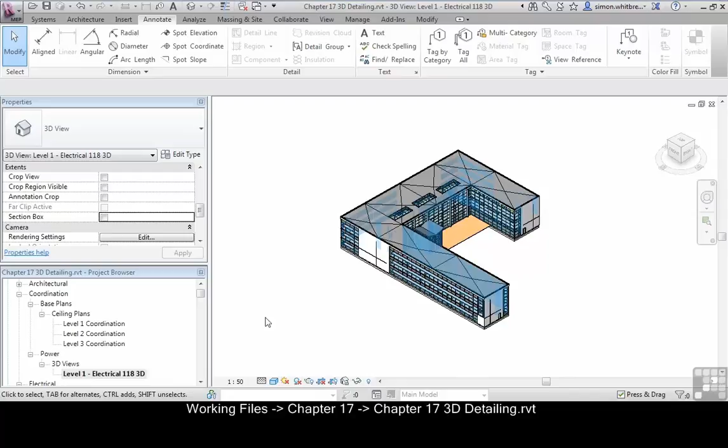Well, strictly speaking, we're not actually detailing. What we are doing, however, is presenting to the reader of our documentation some clearer indication of what our design is all about. From your startup screen, browse to Chapter 17 and open the file Chapter 17 3D Detailing.

In the project browser, scroll down to the coordination section and make sure you have the view Level 1 Electrical 118 3D under the Power section open. I'd like to be able to crop this view so that it matches a section I created in an earlier exercise. I can do this using the section box.

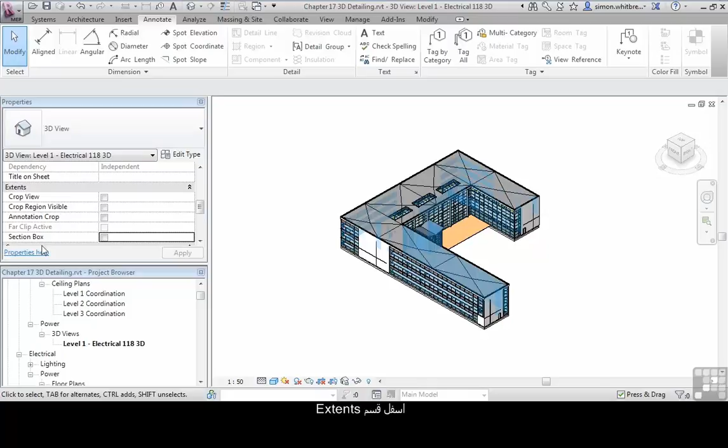The section box can be found in the Properties palette for the 3D view under View Extents. Here's the section box, and if I put a check in it, we'll see that we get this blue box surround our model. If I drag the grips, I can start sectioning the building.

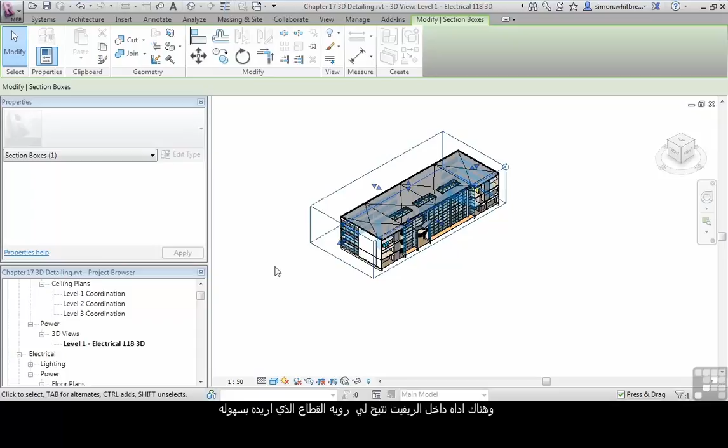But I like to do as little work as possible, and there's a tool in Revit MEP that will allow me to section my building right down to the view that matches my section. Right-click on the view cube in the 3D view. Go down to Orient to View, and I'm going to select a section. And the section is Level 1 Electrical 118 section.

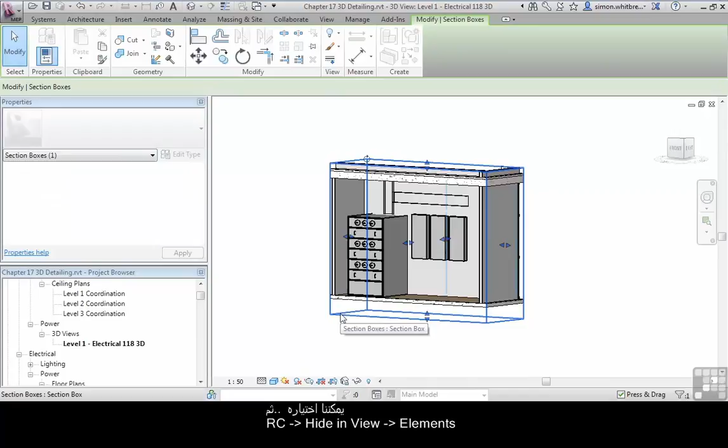Select it. This spins the model around and orientates it as if it were a sectional view, but this is still a 3D view. I can spin it around so that we can see as much or as little of the view as we need. This view can be further stretched using the section box. And when we've finished with the section box, we can select it, right-click, and hide in view.

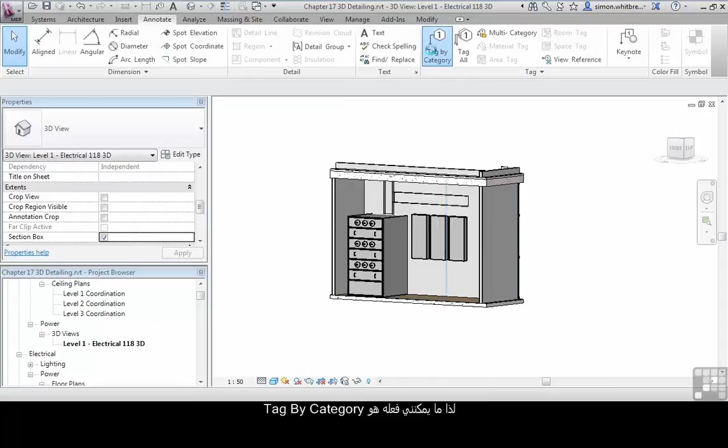The only thing this view doesn't show are the detail lines that I created in my section, which leads me to think that I should have modelled those objects in the first place. The other thing it doesn't have is the annotation. So what I can do here is click on Tag by Category, and I now get a message saying that the orientation of the 3D view must be locked before you can add tags or keynotes.

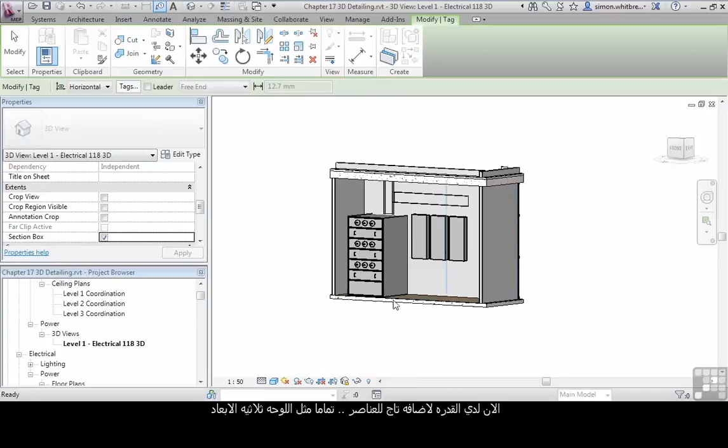Down on the View control bar, I can save the orientation and lock my view. I now have the ability to tag the elements in my view, just as if this was a normal plan. And if needs be, I can drag those off to the side of the view and place leaders on them.

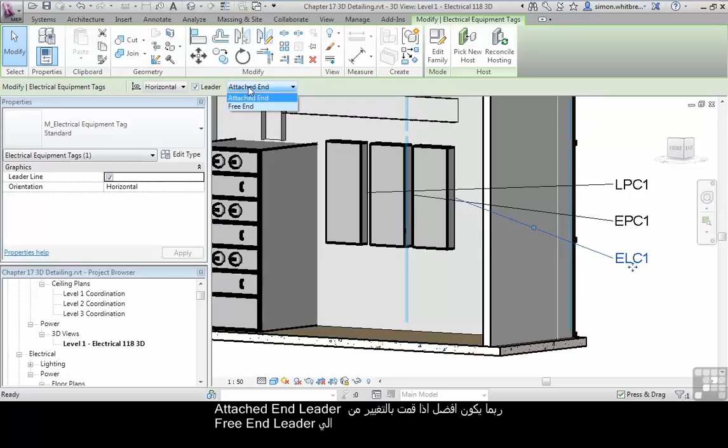To make this more readable, it might be better if I change this from an attached end leader to a free end leader, which allows me to make my documentation look that bit more presentable.